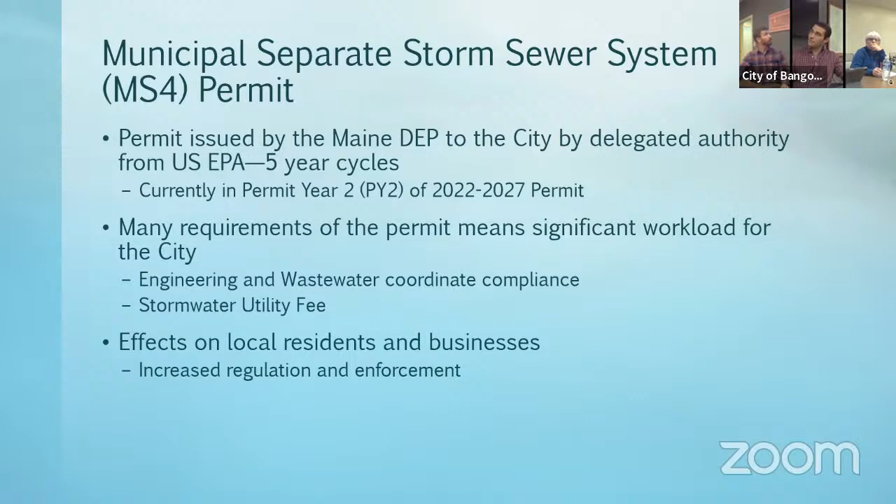So we have a stormwater permit from the Maine DEP. It's part of the Clean Water Act, it comes from the US EPA, and DEP administers it here in Maine. So we deal with them as our regulator.

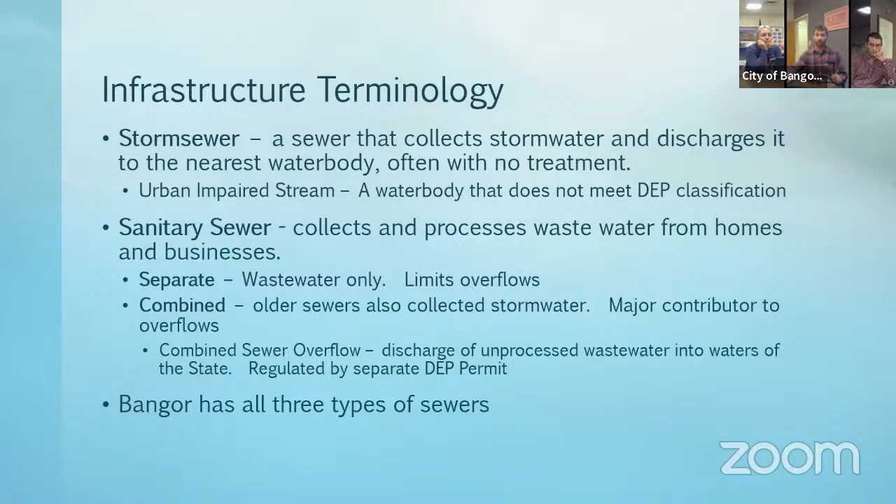There are a few different kinds of sewers here in Bangor. We have storm sewers, which are strictly stormwater - just stormwater going in from the streets and wherever else - and that's what this permit regulates. We also have sanitary sewers, which of course, you flush the toilet, run the sink, it goes to the pipe, it goes to the treatment plant. And then we have combined sewers, which is more like the combined sewer overflow control structures we have, similar to the big tank on the waterfront. Those are permitted separately. And of course, we have all three in town.

This is how the permit is structured - it's a lot of acronyms here. MCM stands for minimum control measure. We have 6 kind of building blocks of the permit. 1 and 2 are public education and outreach, and also public involvement. We have a collective group around the Bangor area that involves 7 municipalities, 5 government entities that are also permitted, and we work collectively to do events and do the outreach for that.

MCM 3, illicit discharge detection and elimination - that's finding pollution sources and stopping them. MCM 4 is construction site stormwater runoff control, mostly having to do with soil stabilization, sediment control, that kind of thing. And post-construction is the management of permitted structures that were required to be put in place to control stormwater on a developed site. That could be for both us or for private development - most of it is private development, of course.

MCM 6, pollution prevention, good housekeeping for municipal operations. Things like what Aaron's staff is doing - they're out ditching, putting hay over the dirt at the end of the day just to keep it from washing away and to stabilize it permanently, just the same as we would expect from anybody else.

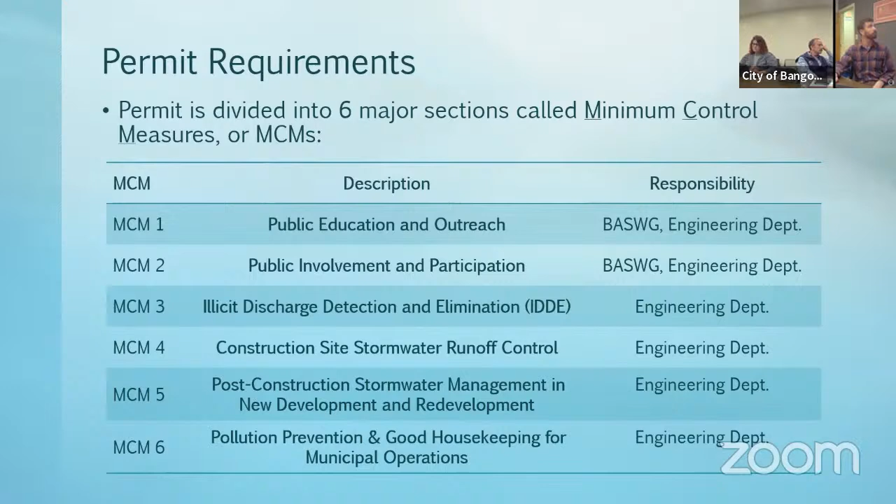So I know I'm going fast. If you guys have questions along the way, just jump in.

As I said, BASWG is our collaborative group that we work with. You may have seen video ads on YouTube, pre-rolls. We started working with a marketing firm probably 6 years ago now, and that really made a difference - having marketing people rather than engineers trying to be marketers. That's how that goes.

Some other items we've dealt with over the past. This is the more satisfying part of the permit: illicit discharge detection and elimination. It's nice to find something happening and stop it from continuing. Some of it is chronic pollution, like a sanitary service connected to the stormwater pipe that goes right to the stream. Others are more like dumping and spills that aren't controlled very well.

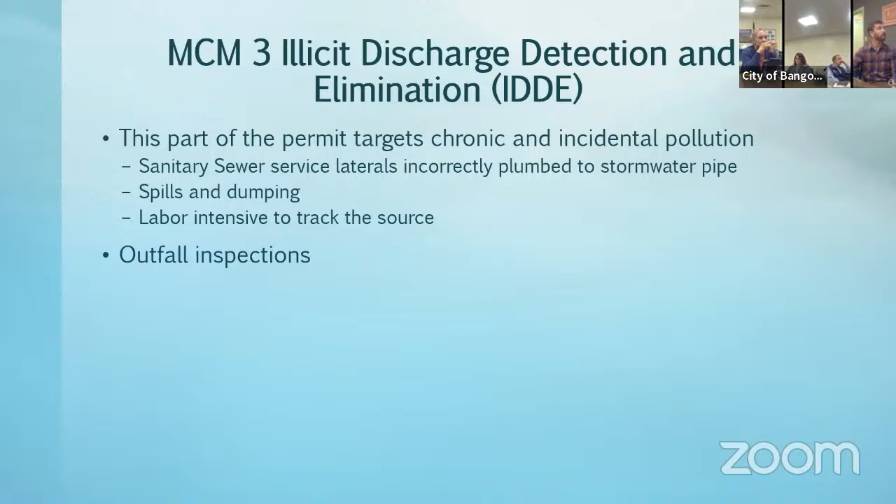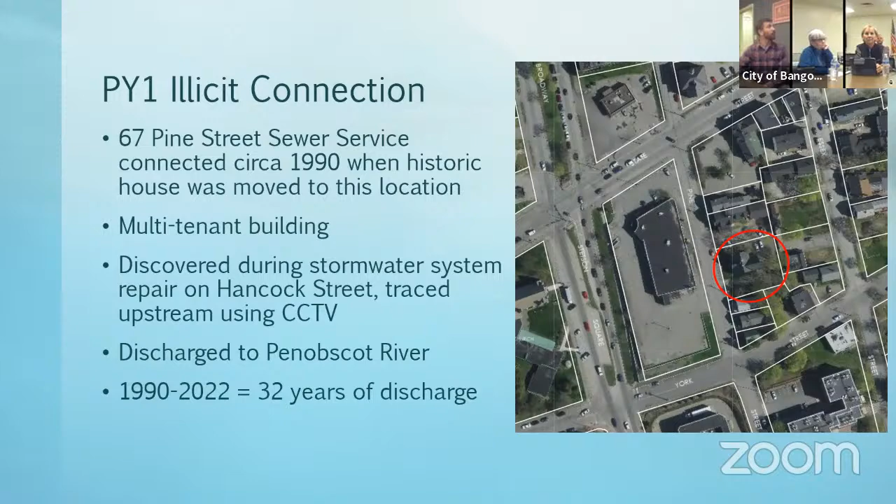This is an example of an illicit connection we had in the recent past. This is Pine Street, 67 Pine Street. This was a historic building that was moved to this lot around 1990. While that lot was vacant, we separated the sewers on that road, so now there's a stormwater and a sanitary sewer. When they moved this house, they connected to the first pipe they found servicing the lot, which went to the old sewer, now the stormwater. So that's about 32 years of discharge there.

You can see that's how we made the new connection. This is where it was previously connected to the stormwater, and we extended that to here.

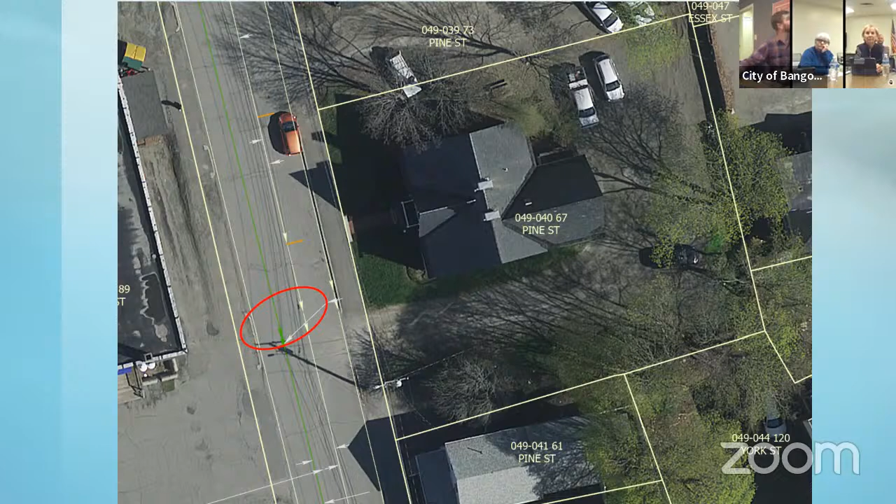Can I ask how that was discovered? Yeah, so when we had Essex Street, that stormwater pipe failed there, and we were redoing that, starting on Hancock Street and going up. On Hancock Street, the contractor was in the pipe, and one day he's like, 'it kind of smells like soap or laundry down here.' I'm like, 'oh, that's kind of weird.' The next day he's in there again and he's like, 'well, that's corn.' I'm like, 'okay.' That was the giveaway — he thought he was just being gracious by saying it smells like laundry. Yeah, it is surprising, you can have a connection like this and look at the water and think it's fine, it's cold, it's clear, but it obviously isn't.

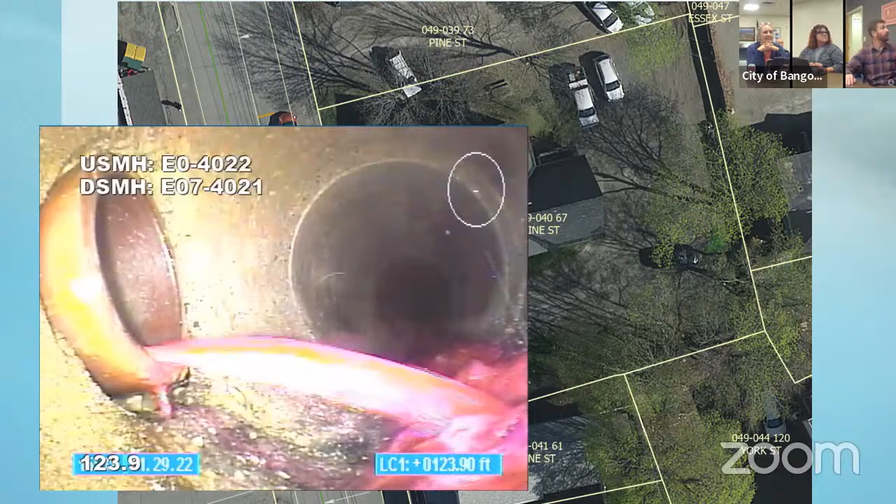So you can see the old stormwater right here. They go under that and then it gets patched in like that. Everybody's happy, we spent lots of money, but we fixed the problem, so we're happy.

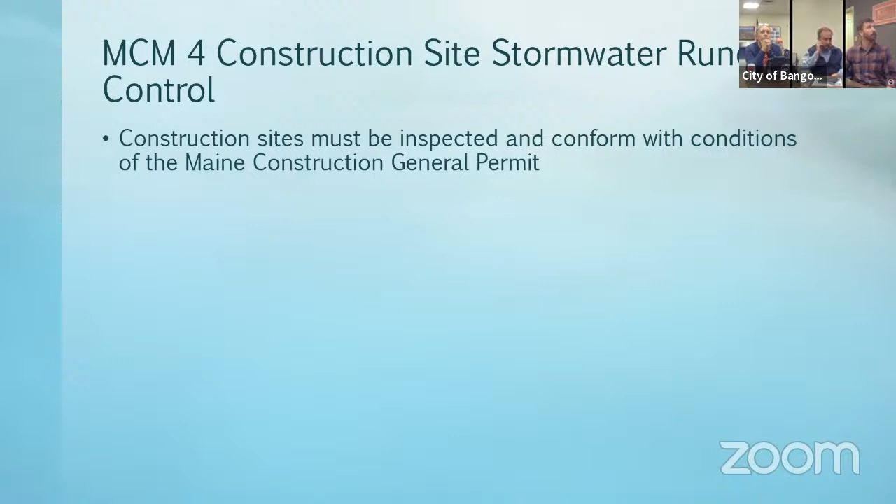That's sort of the best part of that permit, I think, because you find that and it's satisfying. Then there's construction site runoff control — we're required to do inspections on every site that disturbs over an acre, or a half acre in our urban impaired stream watersheds, making sure contractors are taking care of things. I do three of those inspections on each site.

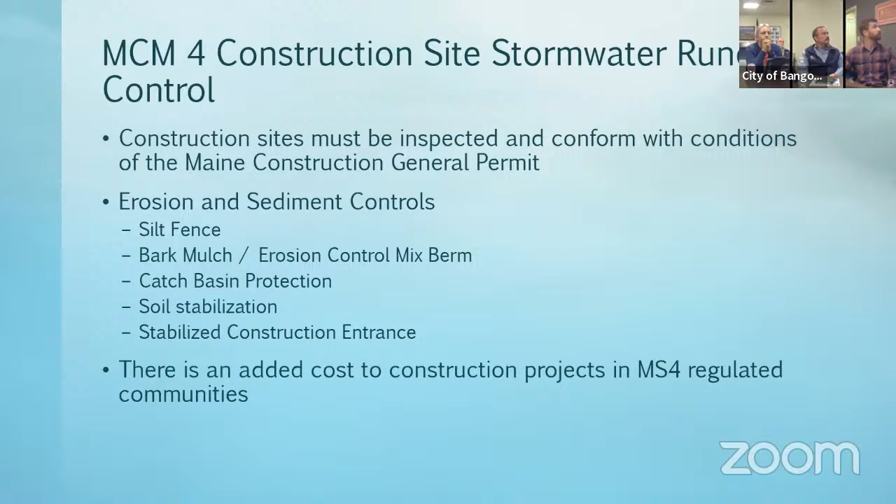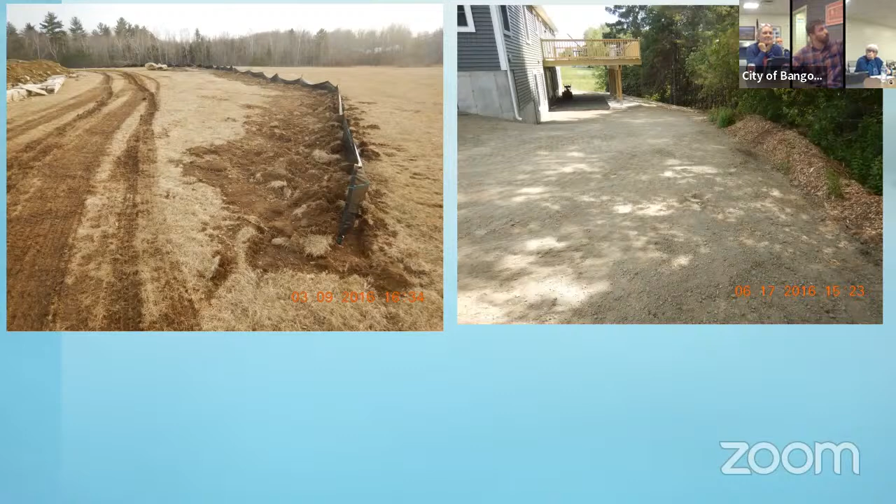That's a silt fence that's properly installed — the bottom isn't flapping in the breeze, which you'll see a lot, but that's a proper installation even though it looks messy. Another example: you can see the wood chip berm, which does the same thing, slows the water down, the fines settle out, and the water leaves the site a little cleaner than it would otherwise.

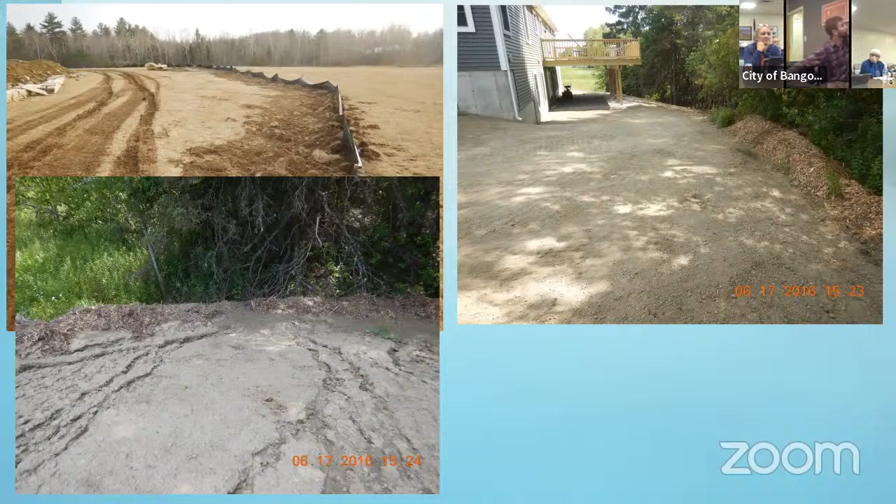You can see it's kind of piled up right here — that's the sediment that would have left the site if they didn't have that berm in place. You can also have a simple catch basin protection like that on a smaller site.

And then here's the end of a project — this is what we're looking for: grass is green, soils are stable, and rain's going to hit that and be absorbed, not run off.

I've seen this presentation many times, but now I notice this stuff during construction, like when Husson was building a new hall, I noticed they had the catch basin protection and silt fencing. So I know this is just your thing you have to do every year, but know that I pay attention and recognize it out in the world. Now I know why, I didn't know the purpose before. And a lot of times contractors will still put up that black silt fence even if they have the wood chip berm, because the public doesn't know the difference, that they both do the same thing. So those kinds of things are nice.

I'm just going to go real quick on this. If you have a pond that you're required to build, you've got to maintain it, and submit an inspection every year.

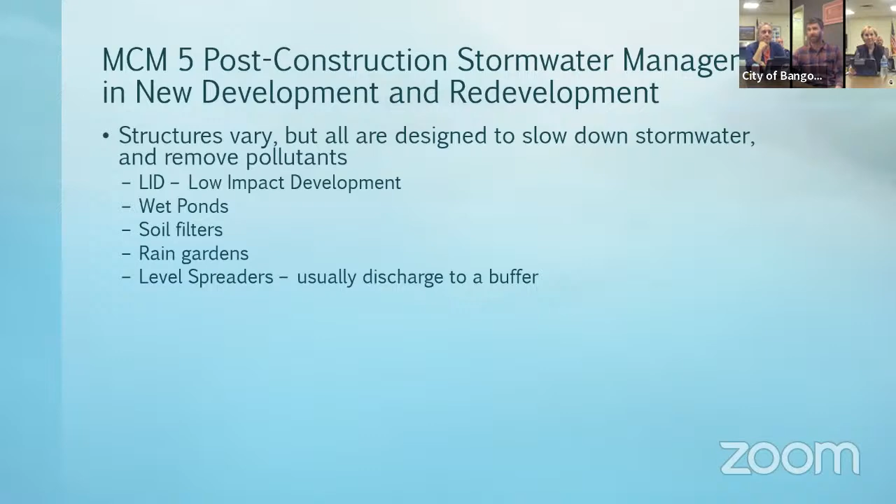Low impact development, we're going to get into that a little later. And MCM 6 covers all of our departments, we're setting a good example, doing the same things. This also includes education of staff and operations for Aaron's department. We do a training every year over there as well.

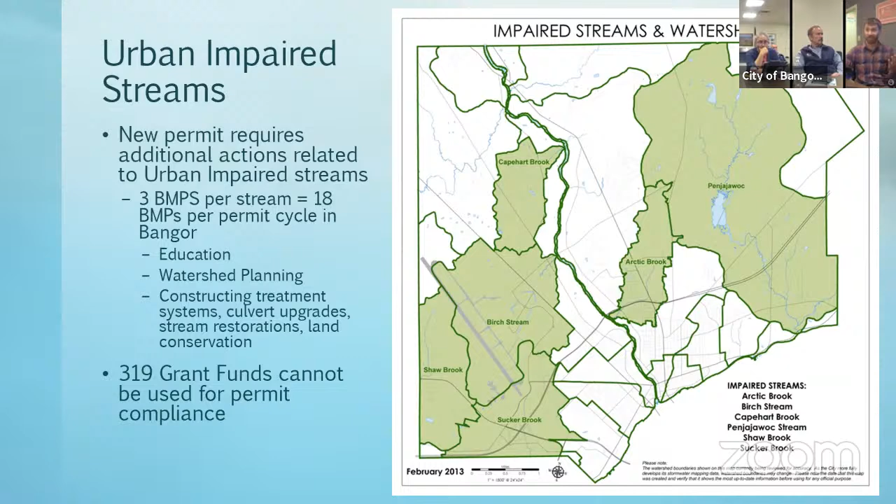Urban impaired streams, we've got a lot of area in town that's urban impaired streams by land area, about 40%. So there's extra requirements there. DEP wants us to do more there, in addition to anybody that's developing land. So it's kind of a big deal for us. Nobody else has 6, we're the leader, unfortunately, in the state.

These are some things we've done in the recent past for urban impaired stream improvements. They're both on Arctic Brook, actually in the same location on Grandview Avenue. So we did an in-stream restoration. We had a fluvial geomorphologist, which is a fancy way to say somebody who understands how rivers work. We also replaced the culvert there to provide better habitat connectivity and flood resilience.

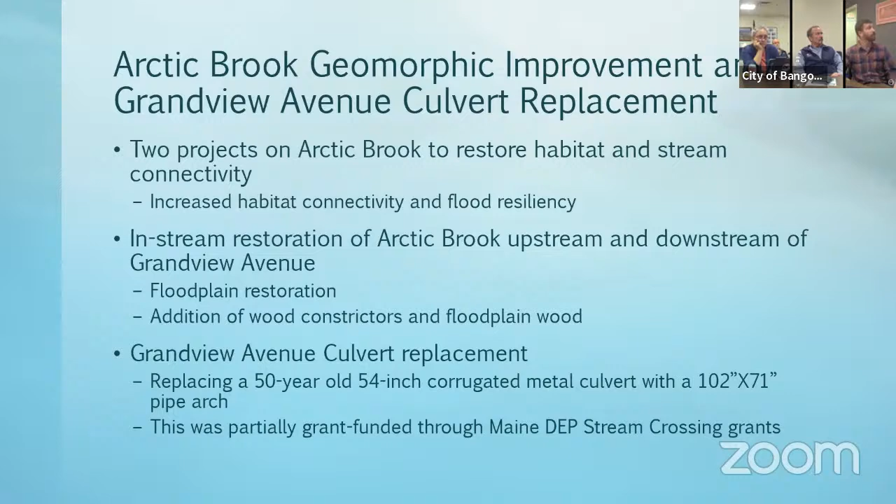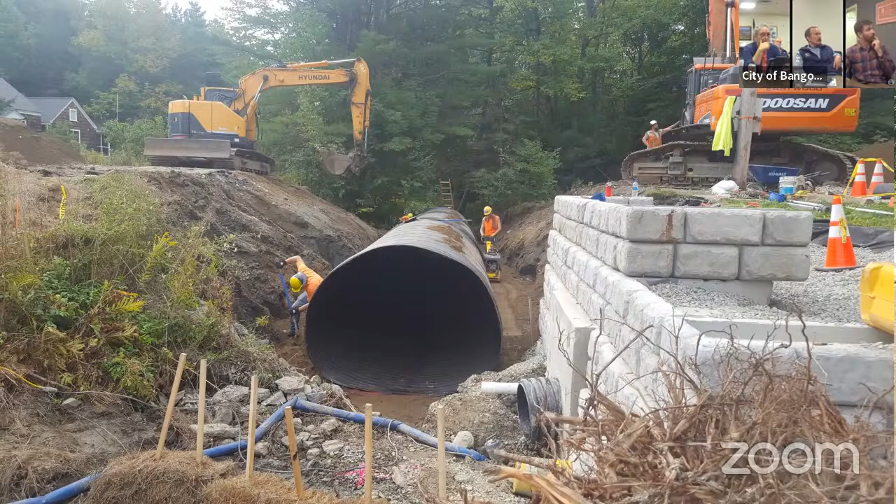So there's the old culvert coming out, you can see it's seen better days. The new culvert is significantly larger to allow those larger flows and have fish connectivity and everything there too.

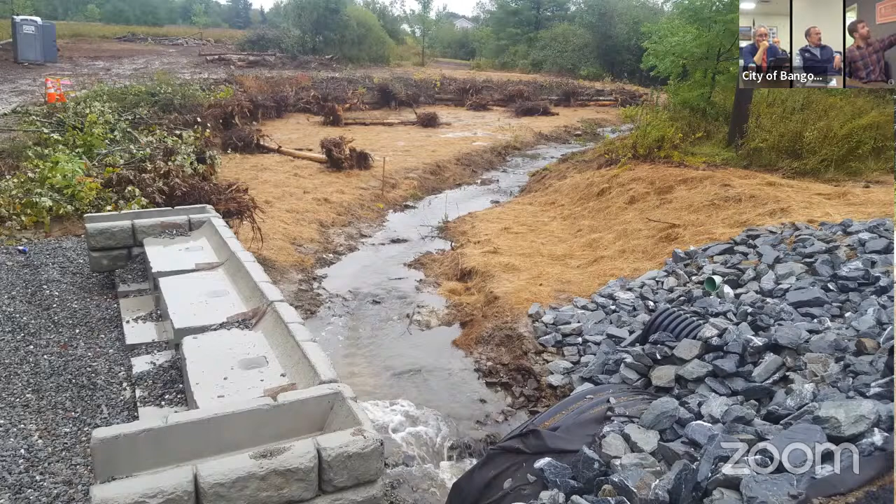And this is upstream. You can see we've excavated that floodplain and placed these logs with the root ball intact. This is going to allow the stream to expand outside of the channel and reduce the energy it has in a flood situation. The logs on the floodplain help with that also. So it looks messy, but it's sort of the way nature would have done it if we'd left it to its own devices.

Has it been put to the test, like the big storms in December? Yeah, I've been out there a few times since it's been done and everything stays where it is. Sometimes there's a little erosion at the inlets or outlets that we repair, but usually once those stabilize, they stay good.

More recently, just infrastructure projects. We did the crossing of State Street near the parking garage for the hospital, Essex Street, which I mentioned earlier, and that included some upgrades on Birch Street. Then Mount Hope Avenue, we had to replace a crossing pipe as well, we did that in the fall near the Humane Society. The Birch Street work also included a separation of the stormwater - there was a leftover catch basin that we missed the first time around, and we got that this time, improving the drainage on the street at the same time.

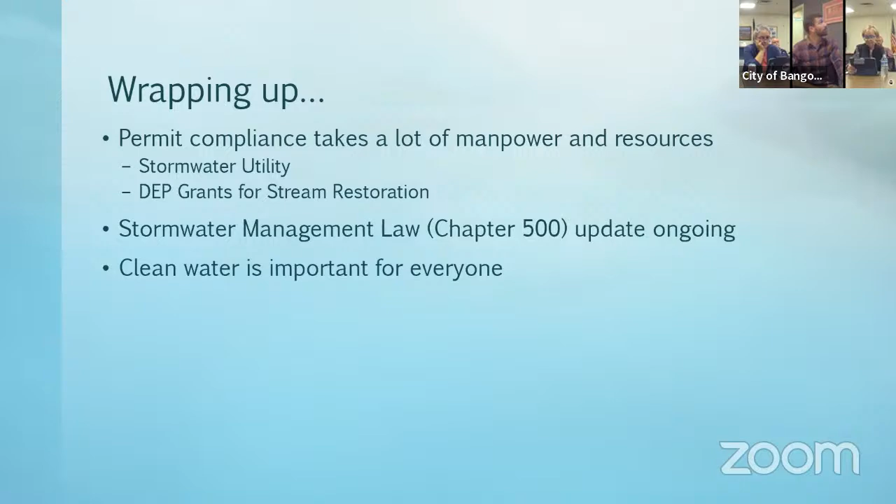So that is pretty much it for that portion. These other little tidbits I'm going to go over in the next portion. Any questions about the presentation? So the next one is the stormwater permitting update.

Yes, so I don't know if you've looked in your packet to see the timeline, but this has been a very long process. So these permits are in 5-year cycles. Oh sure, oh sorry, I don't know. No, sorry, I have it.

So as I said, it's a 5-year permit cycle. Every 5 years, you're supposed to get a new permit. In 2017, DEP anticipated that the permit was going to run out in 2018, and started stakeholder processes with municipalities like Bangor and the other 30 or so that are permitted in the state.

It took until 2020 to finalize a permit, at which point it was appealed by an interest group, and they wanted to see low impact development added to that. So that was added to the permit.

Then we worked with other municipalities around the state to come up with LID standards, as we were now required to do, and submitted those to DEP on an individual basis. We came up with a model ordinance as a whole, then tailored it to each community's needs, individually submitted it. DEP wrote back to everybody saying they have no objection to the proposal as written. That was their words. So then Friends of Casco Bay appealed that again.